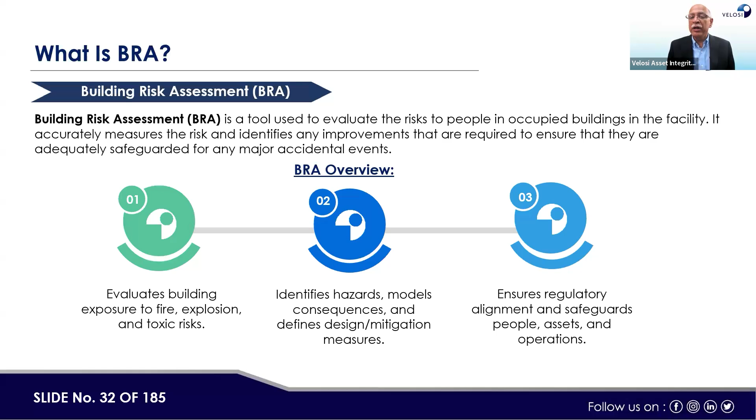If a management team is sitting in the administration building, and if that building is too close to the process plant, and the administration is required to take corrective or preventive action if an incident happens at the facility, but the administrative building or control room would itself be affected by the accident, then who would react to the accident? Who would manage the situation? Who would drive the emergency response plan? That's why building risk assessment is very important for the actions required to be taken post-accident or during the accident at the plant. That's why it is so important.

So what does BRA do? It identifies hazards at an early stage, so we can take action to protect the building. We may also know what consequences it may have in terms of losses, and then how we can prevent those losses. Let's see some examples from where we can learn lessons, where building risk assessment could have minimized or prevented losses.

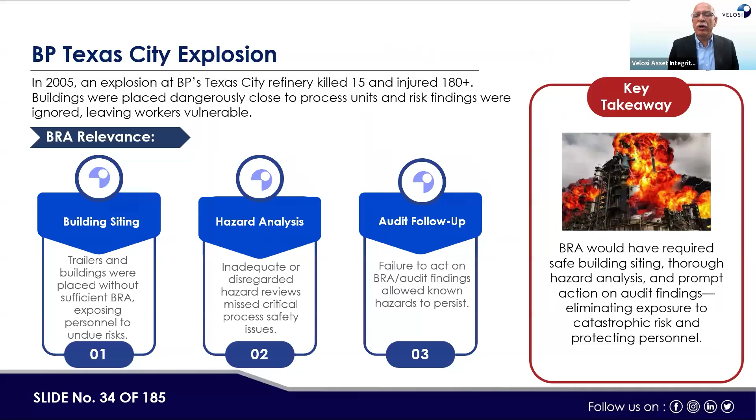In 2005, there was an explosion at the BP Texas City refinery, which killed 15 people and injured over 180. Buildings were placed dangerously close to the process unit, and risk findings were ignored, leaving workers vulnerable. If building siting or layout, hazard analysis, and audit follow-up actions had been done, then even if the accident occurred, the losses could have been minimized. During a shutdown, they placed containers for workers and contractors, and temporary offices were set up around the refinery, which increased the number of fatalities and injuries in the accident.

There's another example: the Phillips 66 Houston Chemical Complex explosion in 1989. A series of explosions occurred at the Phillips Petroleum Company Houston Chemical Complex in Pasadena, Texas. Building and layout vulnerabilities contributed to more losses. A robust BRA could have modeled vapor cloud formation and ignition scenarios, assessed building layout and spacing, blast resistance, separation, ventilation, and identified critical gaps in detection and fire protection systems. This could have helped, but since those studies were not done properly, the incidents occurred.

The answer is D, all of the above. If BRA had been done, building fire from gas leak could have been minimized, equipment damage from flammable vapor could have been minimized, and structural collapse due to explosion could also have been minimized or prevented.

Now, someone may ask, why Mr. Jaz are you going back to the basics? Well, it's basic and simple. What is risk analysis? We all know that risk is a multiple of the probability of failure, or likelihood of failure, into the consequence of failure. And there are three methods: qualitative risk analysis method, semi-quantitative risk assessment method, and quantitative risk analysis method.

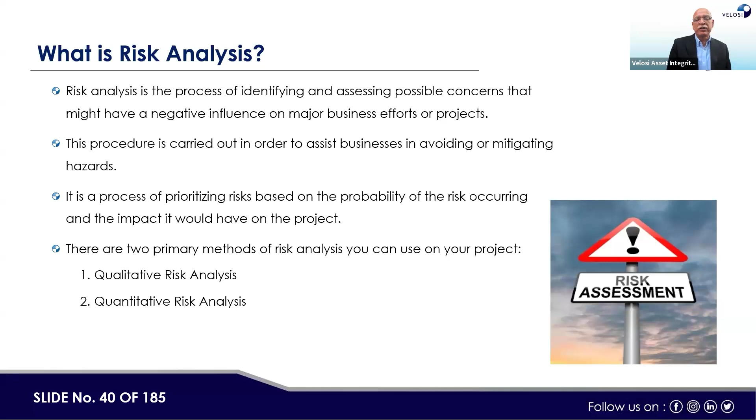So either of these methods can be used in risk analysis. This started in the 1950s as a movement to use an alternative to market insurance. Insurance companies started using it. In 1970 to 1980, derivatives were used as risk management instruments as companies improved their financial risk management. Then in the 1980s, the oil and gas sector started using it practically.

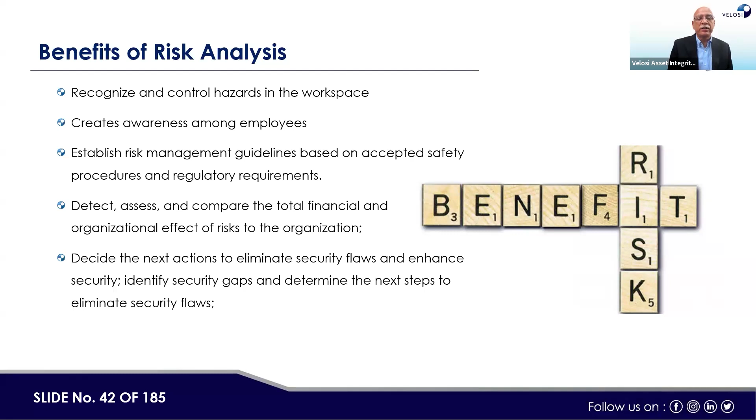Benefits include: we can recognize and control hazards in a workplace, create awareness among employees and people at large, establish risk management guidelines based on accepted safety procedures and regulatory requirements, detect, assess, and compare the total financial and organizational effect of the risk to the organization, decide the next action to eliminate security flaws and enhance security, identify security gaps, and determine the next step to eliminate security flaws.

In general, whatever technique is used for risk assessment, like FERA, QRA, or BRA, these 5 steps are almost common. First, we need to identify the hazards and risks. Then we analyze the risk by multiplying the probability of failure we assess with the consequence of failure we assess, and we get the risk. Then we develop a risk management plan - depending on whether the risk is driven by probability of failure or consequence of failure, controls or mitigation measures should be implemented. Then implement the risk management plan, then monitor the risk. These are the normal 5 steps in the risk assessment and management process.

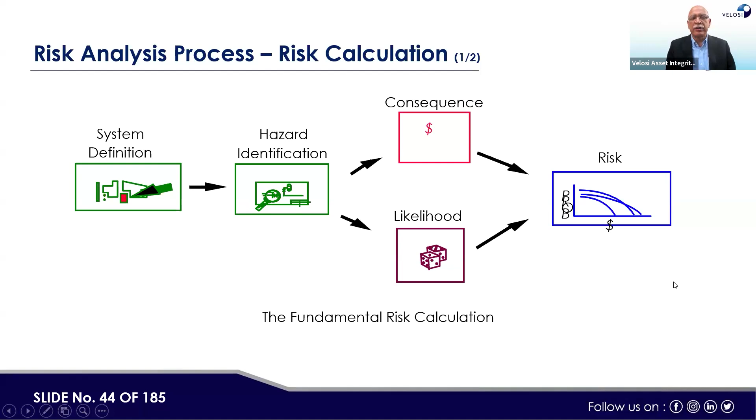If you see in terms of dollars, so we have system definition, then hazard identification, consequences, then likelihood of failure, then we get a risk. Normal fundamental definition. I know I'm repeating this for the youngsters, so you can understand the concept of risk.

We try to understand risk in terms of cost, so it can be applied. Let's take an insurance company as an example. The risk for the insurance company is the POF and the COF. Let's say one insurance company insures 1,000 cars in UAE, and charges a premium of $1,500 per year per car. The total revenue of the company is 1,000 multiplied by 1,500, which is 1.5 million US dollars.

If the number of accidents in 1 year is 50, then the chance of accident is 50 over 1,000, which is 0.05 per year, and the price for each car is, let's say, $15,000. Then the cost the insurance company ends up paying is 750,000, leaving a margin of 750,000. But if due to rainy season, fog, or other reasons the accidents go to 100, then it would be break even. But if the number of accidents goes more than 100, the insurance company will be making losses. That's why sometimes insurance companies get bankrupt. So this is an explanation of how we can associate risk with the number game in our mind.

The types of risk assessment, as I said earlier, are qualitative and quantitative. Qualitative is more judgmental based, like a team gathering - we get the idea of what the probability of failure people may contribute, then what is the consequence, and then by assessment, what would be the risk position. Whereas quantitative means there would be some numbers for the probability calculations, and some numbers for the consequence calculations. These numbers, when multiplied, give you a quantitative risk number. So that is the difference between qualitative risk analysis and quantitative risk analysis.

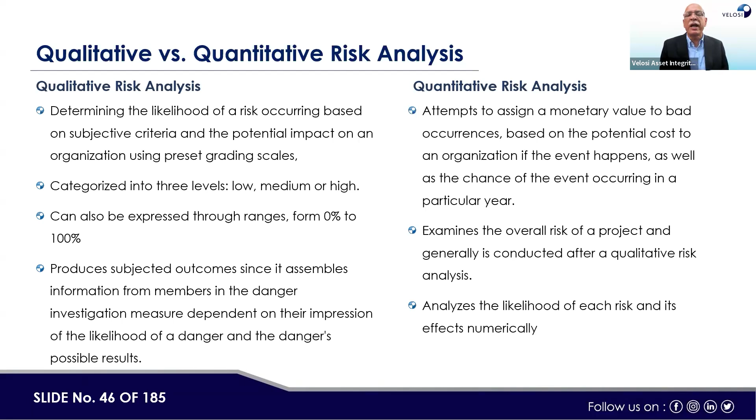Now, a demonstration of qualitative or semi-quantitative risk assessment - for example, a bow tie. In this example of a bow tie, if there is an incident, we look at what causes it first. These causes could be, for example, corrosion, lack of safe design, lack of maintenance, or lack of proper operations. This can be managed or prevented by better design, better operating instructions, better maintenance management systems, and so on, so that the leak or release of material from the pipe does not occur.

If it occurs, it may have serious consequences in terms of fire, explosion, and fatalities. How can we prevent that? That can be prevented by fire and gas detection systems, firefighting systems, or by putting bunds around the tank sides, and so on. So in this way, we can see how these hazards are first escalated or prevented, and how the consequence can be mitigated and prevented as well.

As I said earlier, there are various types of risk assessment techniques used for risk management of facilities. First is QRA, quantitative risk assessment. Then ESSA, emergency systems survivability assessment. Then ERRA, evacuation, escape, and rescue analysis. FERA is fire and explosion risk assessment. BRA is building risk assessment.

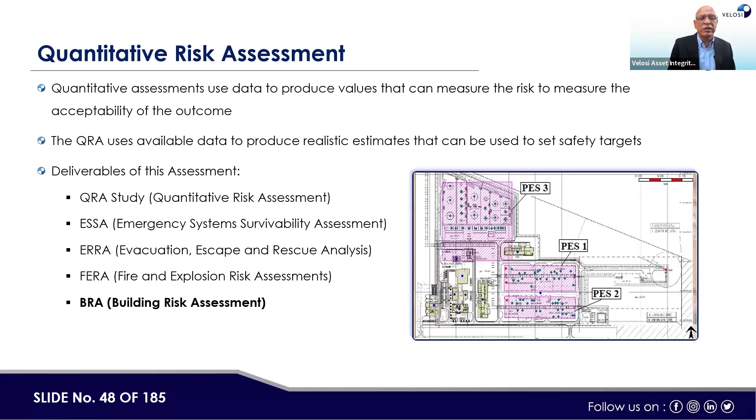All these techniques are used to assess how facilities are exposed to certain hazards, how they contribute in terms of consequences and risk, and how we should take the required preventive measures. Now if we compare these techniques, BRA, QRA, and FERA are all risk assessments, only the final outcome is a little different. We should remember this.

BRA evaluates risk to people in an occupied building from a fire, explosion, or toxic release in the building or nearby. QRA quantifies likelihood and consequence of hazardous events using measurable data. FERA is a focused study of fire and explosion hazards and their impact on the plant and neighboring plants. So FERA sometimes covers the BRA part also, and QRA sometimes also covers most part of BRA as well.

The purpose of BRA is to protect building occupants and recommend mitigations. QRA's purpose is to demonstrate facility safety, support ALARP, and cost-effective safety decisions. FERA's purpose is to identify and minimize fire and explosion hazards and ensure risks are within ALARP.

ALARP means as low as reasonably practicable. In terms of scope, BRA is narrow, covering building occupants; QRA is broad, covering entire facility operations; FERA is medium, covering fire and explosion risk affecting assets and people. QRA may be used as a final stage, integrated with FERA input, used independently or within BRA, and FERA provides hazard data feeding into both BRA and QRA.

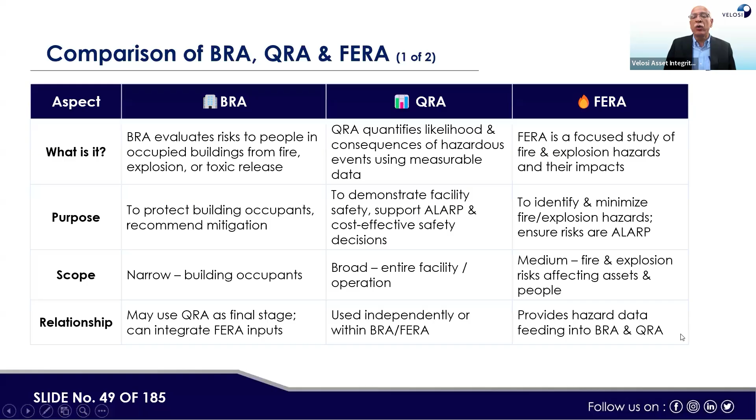In terms of process, though there are three stages, the process is basically the same, with five steps. First hazard identification, then consequence modeling, detailed as needed for QRA or BRA. Then frequency and consequence analysis, compared against occupant acceptance criteria. FERA also involves hazard identification, fire and explosion modeling, and risk evaluation. So the process is more or less the same.

In terms of output, BRA gives a report with hazards, occupancy data, and safety recommendations. QRA gives numerical risk values, risk contour maps, and ALARP justification. Then there are recommendations for fire protection, safe layouts, and mitigation measures. For application, BRA is used to assess safety of the occupied building, in compliance with API RP 752, and is used across the facility life cycle to justify safety decisions. FERA forms the basis for fire and explosion protection systems and supports BRA and QRA as well.

So this is a normal comparison. If you want an easy way to remember it: BRA is for the building, QRA is overall facility risk assessment, and FERA mostly focuses on fire and explosion impact on the assets and facilities.

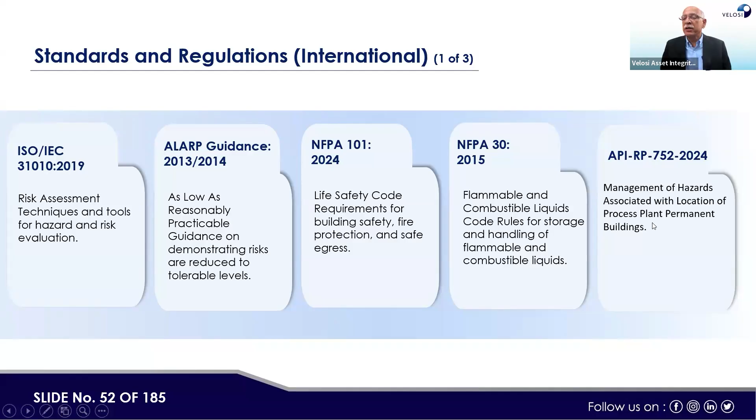Next, ISO 15544, petroleum and natural gas industries offshore production installation requirements and guidelines for emergency response, which would be applicable for buildings. Then API RP 14J, recommended practice for design and hazard analysis for offshore production facilities. API 14C, analysis, design, installation, and testing of safety systems for offshore production facilities. API RP 750, management of process hazards. And a very normal standard, risk management guideline principles, ISO 31000.

These are the standards, and also there are others like DNV Safeti or PHAST training software. Then there's the Yellow Book, methods for calculating physical effects, and the Purple Book, guidance for quantitative risk assessment. So these are also international standards.

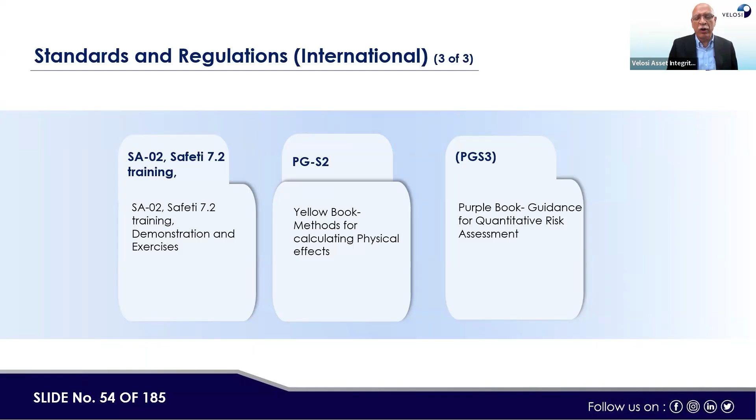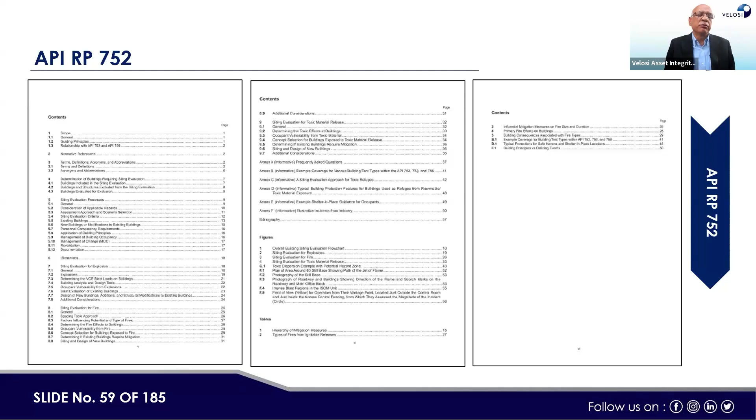Now these are the standards. I'm not going through each because I mentioned front pages are also there: ALARP framework, life safety code, NFPA 101, NFPA 30 flammable and combustible liquid code. Then there's an index for API RP 752, which is basically building protection point of view standard.

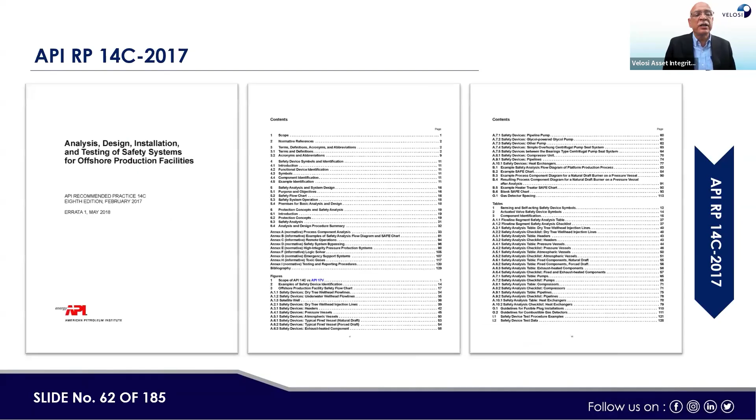Then ISO 15544. This is also offshore production installation requirement for the guidelines for emergency response, as I mentioned earlier. API 14J, recommended practice for design and hazard analysis of offshore production facilities. Then analysis, design, installation and testing of safety systems for offshore production facilities.

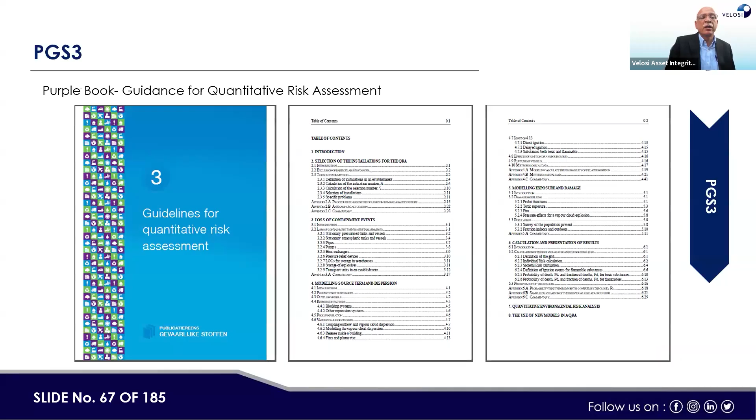Then management of process hazards, API RP 750. Then risk management guidelines, 31000. So there is a safety training manual from DNV GL, the older one. Then this is a method for the calculation of physical effects, TNO standard. Yellow book and purple book, guideline for quantitative risk assessment.

Then there is an ADNOC standard also because we are mostly operating from Abu Dhabi. The ADNOC has one of the best code of practice series for HSE management for each project. So we are also using them as one of the best practices being used by ADNOC in the region.

For example, ST10 is basically an HSE management system QRA standard. Then ST06 is regarding the control of major accidental hazard guideline or standard. Then there is also ST03, which is basically how to identify HAZID, ENVID, and OHID - safety hazards, environmental hazards, and occupational health related hazards - how they should be identified in a workshop.

ST03 basically provides the guidelines. Then HSE RM ST09, which is basically the FERA guideline or standard. Then HSE RM ST07, this is the ERA standard. There are other standards also referred in these standards, which provide quite good guidelines on how the international standard could be interpreted to make easier use.

So ADNOC has provided these standard guidelines, which are more simplified and all steps are very clearly defined, and people can use them easily.

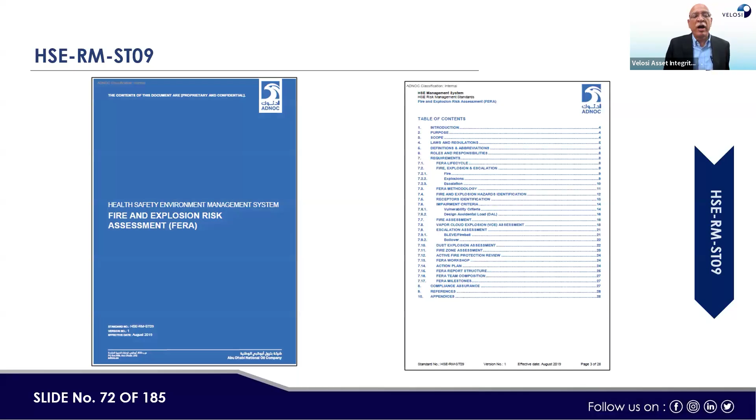So this is ST10, which is the QRA standard. This is basically the control of major accidental hazard, ST06. This is basically for ENVID, OHID, and HAZID workshop related guideline and standard. And this ST09 is related to FERA, fire and explosion risk assessment, and this is basically ERA. There are similarly guidelines for ESA as well as other studies associated with the ADNOC guidelines.

So now we start our BRA case study. One thing I would like to clarify is that we have modified the data so it does not reflect the actual situation of any facility. It's a mix of a few studies. So if any information correlates with any one particular facility, it does not mean we are presenting the actual case. The actual case has been modified and practically distorted to hide the actual situation of the facility.

So here, HSEIA study scope: Velosi was appointed by the company to carry out HSEIA for a project, including building risk assessment. An integral part of the HSEIA process is to carry out building risk assessment study, which is developed in line with ADNOC COP. At that time, ADNOC COP was an older standard because the study is older, V1-02 and V5-06.

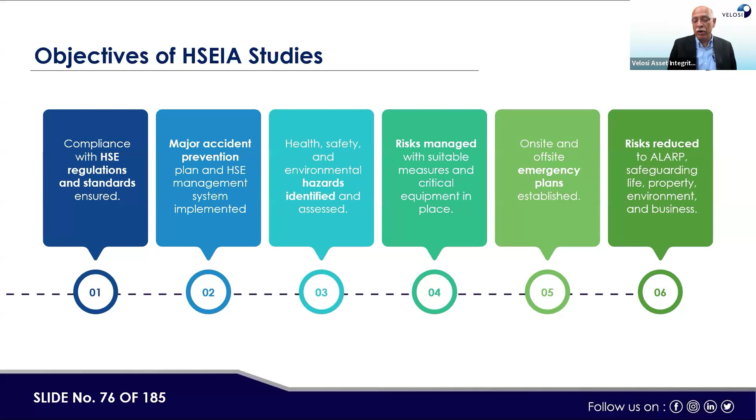So objectives of the HSEIA study were compliance with HSE regulations and standards, major accidental prevention systems should be developed, health, safety, and environmental hazards should be identified, risk should be managed, on-site and off-site emergency plans should be prepared, and everything should be within the acceptable or ALARP region. If you see, the studies are almost 20.

If you see here, BRA is one of those, including HSEIA workshops like HAZID, ENVID, OHID, Bowtie, SIMOP and ALARP. Then HSEIA studies include HSEIA screening report, HAZID, ENVID, and OHID register, HEMP review and analysis, EIA report, then PPC report, noise assessment study, H2S zoning report, QRA report, FERA report, BRA report, ERA report, ESA report, HSE critical activity register, HSECES performance standard, COMAH report, then action tracking register and HSEIA report.

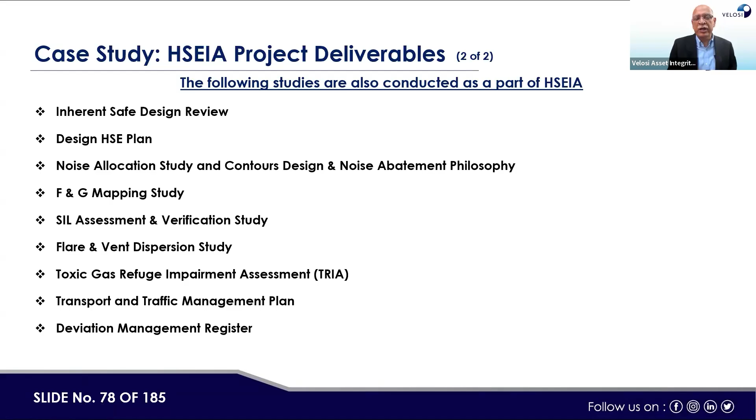This is the family for the HSEIA. Then there are other additional studies like inherent safe design review, design HSE plan, noise allocation study, F&G mapping, SIL assessment and verification study, flare and venting, vent dispersion study, toxic gas refuge impairment assessment, transport and traffic management plan, then deviation management register. So those were all the deliverables we delivered as part of this project. But our today's focus is mainly on the BRA.

So what is the BRA scope? We were supposed to carry out the BRA study to cover these 8 buildings, including substation 1, substation 2, warehouse, maintenance workshop building, control room and office building, laboratory building, canteen, locker buildings, gate access buildings, and truck loading shelter.

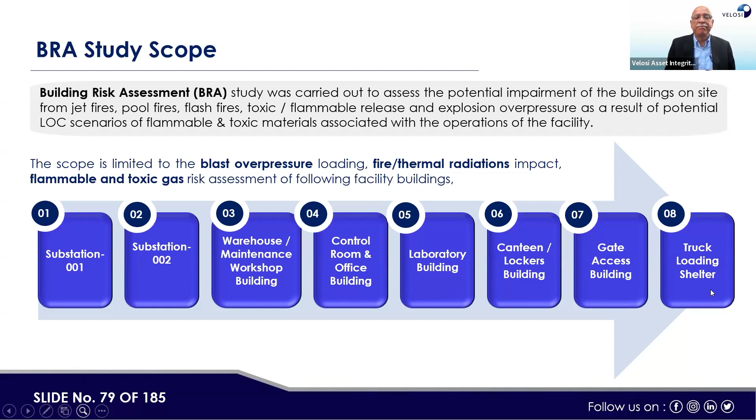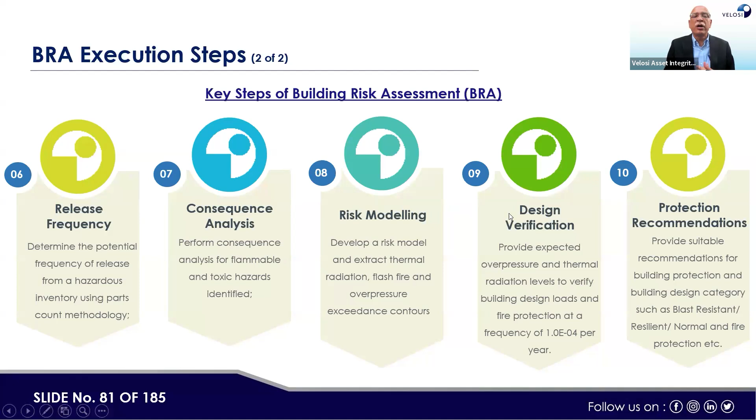So BRA execution steps, how would they do it? It's the same steps we identified earlier. It carries almost 10 steps: hazard identification, process definition, isolatable section and parts count, isolatable sections volume and mass estimation, congestion mapping, release frequency, consequence analysis, risk modeling, design verification, and protection recommendations. These are basically the 10 steps required for execution of the BRA study.

Deliverables: the BRA report, which covers terms of reference, methodology, consequence modeling, results, risk evaluation, recommendation, data tables, and figures. Supporting documents, risk matrices, plot plans, documentation of mitigation measures. Actionable information for stakeholders, awareness of risk compliance, improved building design. These are basically the deliverables for the BRA scope.

Basic data requirement, what we need is basically the PFDs, P&IDs, heat and material balance, manning distribution philosophy on the buildings, then risk tolerability criteria, applicable codes and standards, and building occupancy data also.

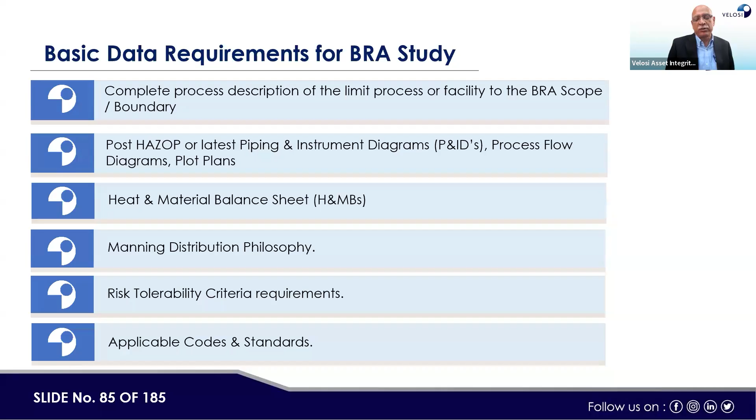Process description: in this particular study, the various units involved in the process include a fractionation unit, distillate Unionfining unit, Molex unit, PACOL unit, PEP unit, Detal Plus unit, nitrogen removal section, utility system, jetty, terminal, truck loading station. Those are units that were part of the overall process facility. Name-wise, we are not giving the overall name of the facility.

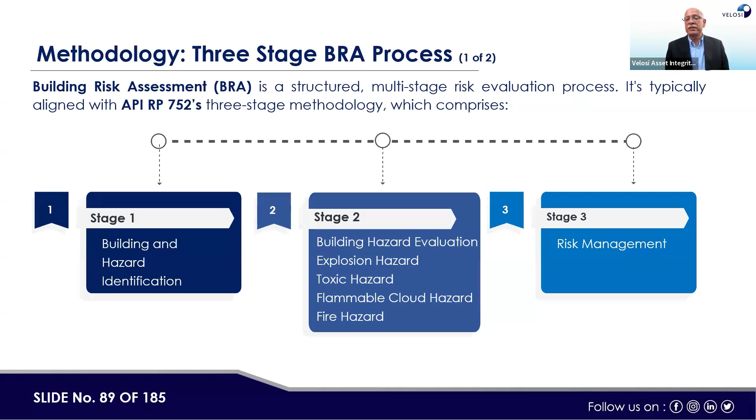From an approach point of view, we give more detail. 10 steps are there, but those 10 steps are done in 3 stages. Stage 1 is building and hazard identification. Stage 2 is building hazard evaluation, covering explosion hazard, toxic hazard, flammable cloud hazard, and fire hazard. Then risk management is stage 3.

In detail, buildings are identified by occupancy and functionality. This helps highlight those needing further assessment. As per client requirement, all buildings will be assessed. Buildings from stage 1 will undergo further assessment. A consequence-based approach will be used, focusing on worst case credible scenarios. The aim is to assess impact on buildings, including potential harm to occupants and loss of functionality.

Then stage 3 uses a risk-based approach. This method is quantitative in nature. It considers both consequences and frequencies, and so on.

Now, for people familiar with ADNOC deliverables, this is one of the flow charts. It starts with data collection, then we carry out HAZID, ENVID, and OHID workshops, focusing on the BRA or QRA or FERA, starting with the HAZID.

Then HAZID workshop reports lead to hazard classification into MAH and non-MAH. MAH are further taken to the Bowtie, which identifies a graphical representation of all the layers of protection, then HECS identification, and then performance standards. Non-MAH are managed via HSEMS. For the MAH, the real HSE studies like OHRA, EIA, air noise, QRA, FERA, SIMOPS, MOPO, BRA, ESSA, EERA are done, and finally the COMAH report is compiled.

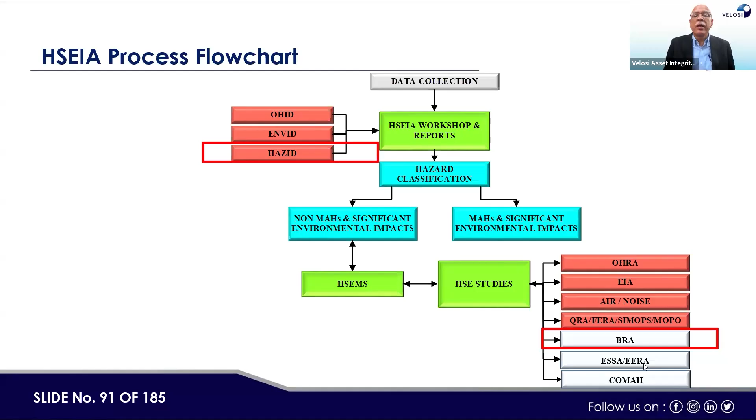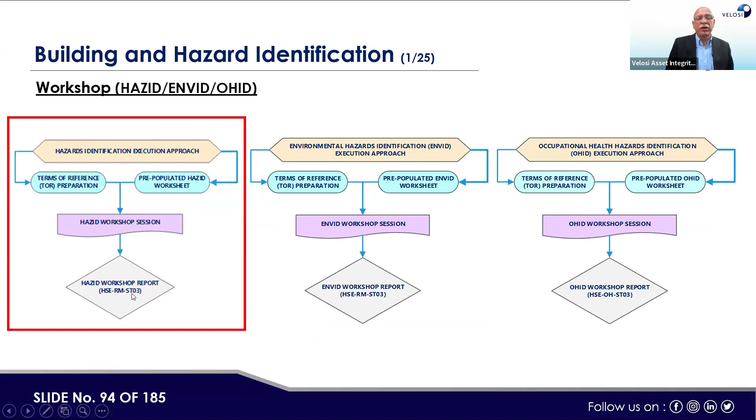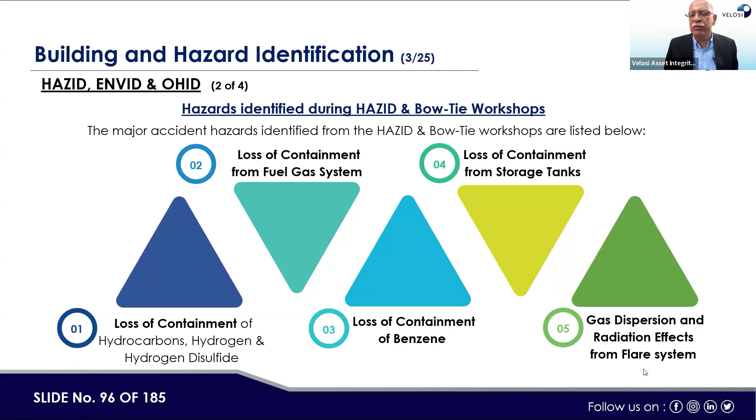So here, for example, loss of containment from the fuel gas system, loss of containment from storage tanks, loss of containment from benzene, or the various process units which were involved. So all those hazards are assessed one by one.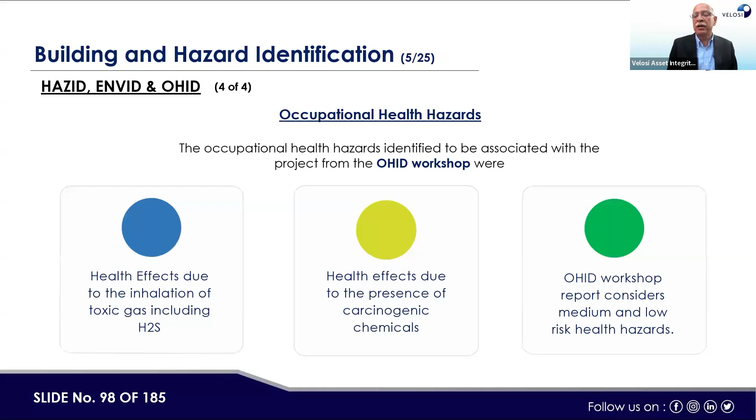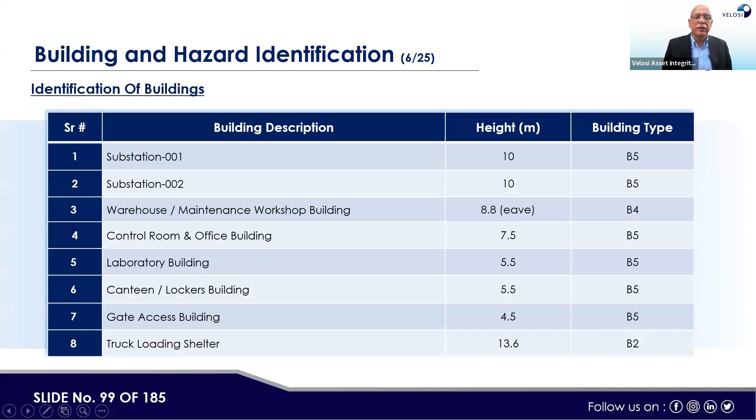So here, the identification of the buildings - these are the buildings by category, B5, B4, the type of occupancy of the building and their heights. These are the 8 buildings what we are assessing, and their locations are shown in a certain area.

So this is not the subject, but I showed you so you can see the full process of the system. Then, the first thing we do after HAZID, is when you start the BRA study, QRA study, or FERA.

In general, at Velosi, when we have to do these three studies, first of all we try to do FERA. Then the same information is carried forward for QRA, and the same information is carried forward to BRA. So basically there are common steps, like isolatable sections, which are marked on the P&IDs with the help of the ESD valves, and also remotely operated control like motorized operation valves.

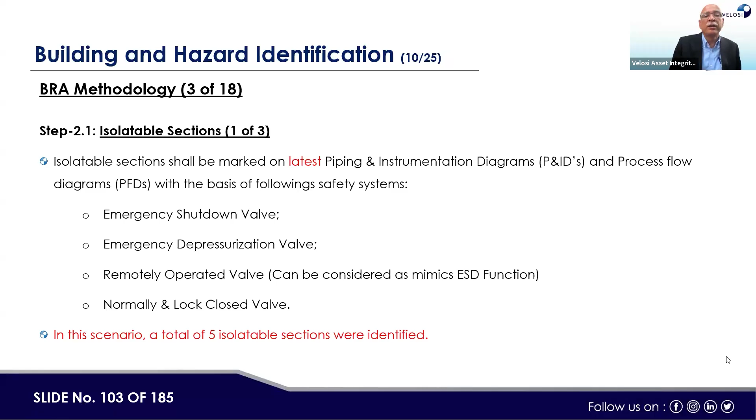They could be closed by automated action. Then there are normally-closed and lock-closed valves, or there could also be isolation by the pumps and compressor bodies. Then these isolatable sections are shown - some data has been changed here because we didn't want to show the actual data.

So where various isolatable sections are marked - and how are they marked? They are marked on the P&IDs. If you can see here, you can see them color-wise.

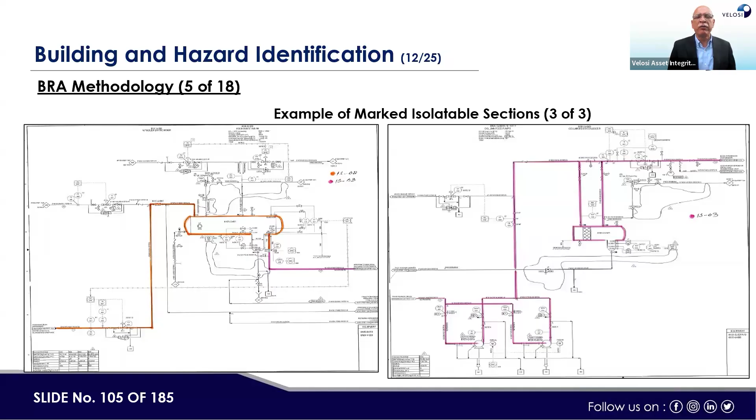There is one isolatable section. Here we can see one and two isolatable sections. Like inventory groups - if people are familiar with the RBI concept - if any leak or rupture would occur, then until the isolation is done, how much volume would come out?

That would be driven by one isolatable section, or in RBI we call it an inventory group. So then from each isolatable section, we have to see the probability of leak, like how many flange joints are there. Normally leak will occur from the flanges, and secondary leak may also occur due to corrosion, like if a hole is there in the body of the pipe or body of the vessel.

So here we try to count all those - flanges, manual valves, instrument connections, pressure vessels with connection 50 to 150, with connection greater than 150, then centrifugal pumps and piping length. So in this we try to find the parts count methodology and leak size distribution.

Then we try to see what kind of potential hole could be there: 1 to 10 mm, 10 to 50 mm, 50 to 150 mm, greater than 150 mm, or rupture. Then piping size leak for full bore rupture is also considered.

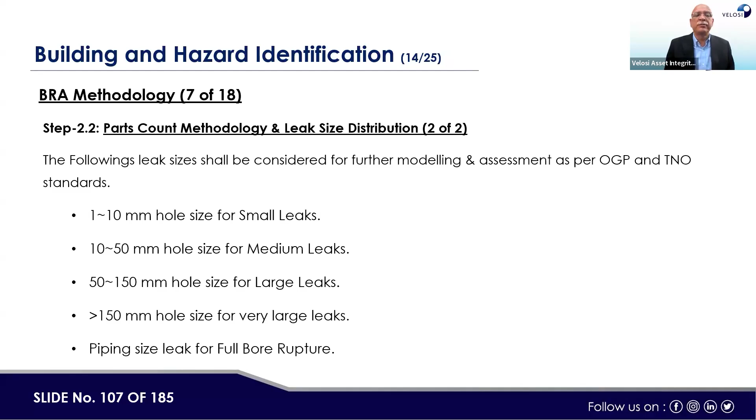Then the input sheet, source term modeling, inventory calculation - when we have to import data into the software, we use Safeti and PHAST software. So we need to estimate the volume of each isolatable section with its composition, with the operating condition, which we take from the heat and material balance of the process flow diagram, PFD.

So that information is updated, and we calculate what is the volume based on the specific gravity in the heat and material balance, what mass flow rate would be there. Then accordingly, that data would be used by the software for the consequence calculations using Bernoulli's equation and thermodynamics equations, or the reaction kinetics equations.

These are the three equations: number one, Bernoulli's equation for the dispersion; then thermodynamics, also for jet fire effect; and then reaction - heat of reaction is taken for fire and explosion. So these three types of equations are used for the calculations by the Safeti and PHAST software.

In the input sheet for source term modeling and inventory calculation, when we consider the flow once the system is taken in, there are two kinds of volume: static volume and dynamic volume. Static volume is derived from the length and diameter of the vessel. Pipes, with their diameter and length, also give you volume. The sum of all those volumes gives you the static volume.

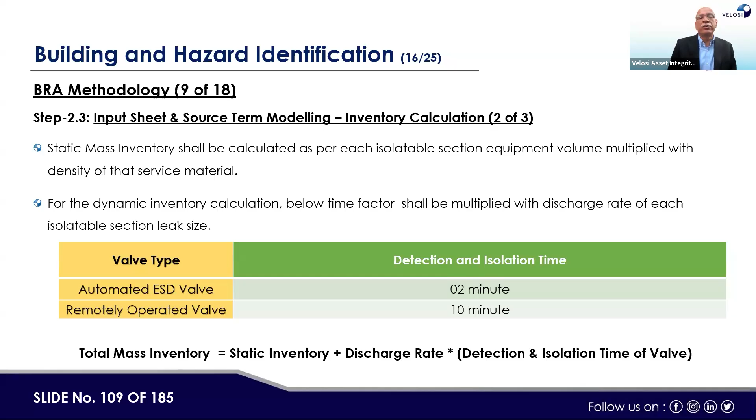This is a little complicated calculation, but if we do it step by step, it can easily be done. Then input sheet and source term modeling, inventory calculation.

Then failure frequency estimation is done based on the parts count. The total failure frequency of one isolated section is a count of type of equipment, POF, and count of equipment, and the POF of each type.

The frequency of the loss of containment for each leak source shall be taken from a validated industry database and combined with the parts count to generate the failure frequency of the leaks from each section.

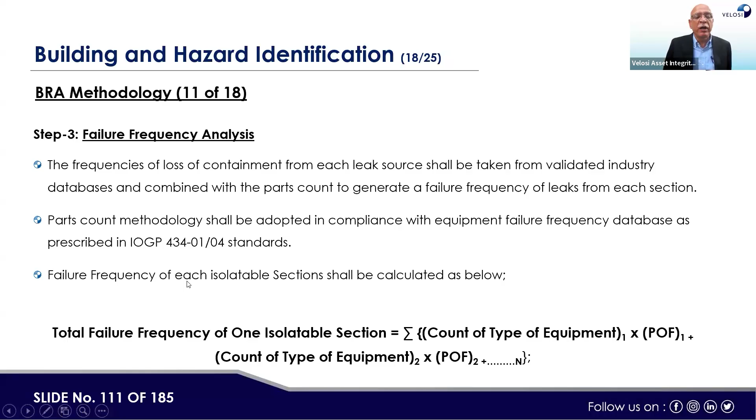Parts count methodology shall be adopted in compliance with equipment failure frequency database as prescribed in IOGP 434-01/04 standards. The failure frequency of each isolated section shall be calculated as below as a combined calculation.

Then for consequence result assessment criteria, when doing the BRA modeling, the following results would be extracted from the PHAST software: jet fire, flash fire, vapor cloud explosion. These are basically the criteria we have to use for acceptance or vulnerability aspects as well.

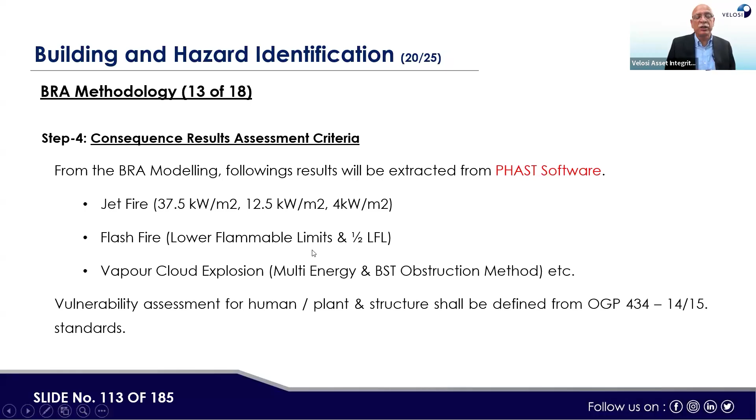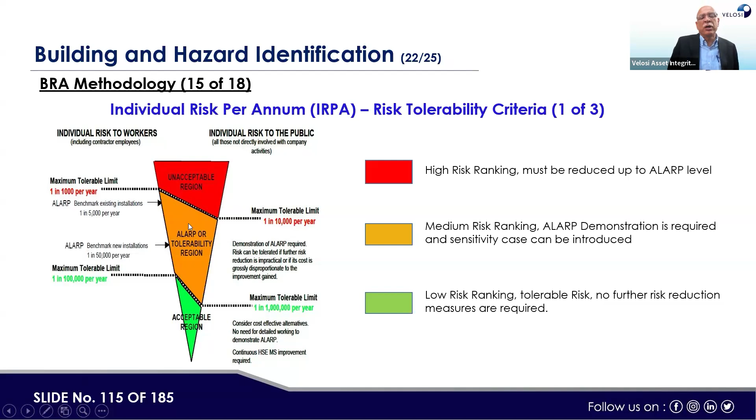Then we have to see the ALARP. Like everything, we cannot bring it to the very acceptance limit, because if we try to bring this level of risk acceptance criteria, the project cost will go very high. And in the unacceptable region, we cannot operate the plant because there would be risk of fire and explosion. So we need to operate the plant within ALARP, which is called as low as reasonably practicable.

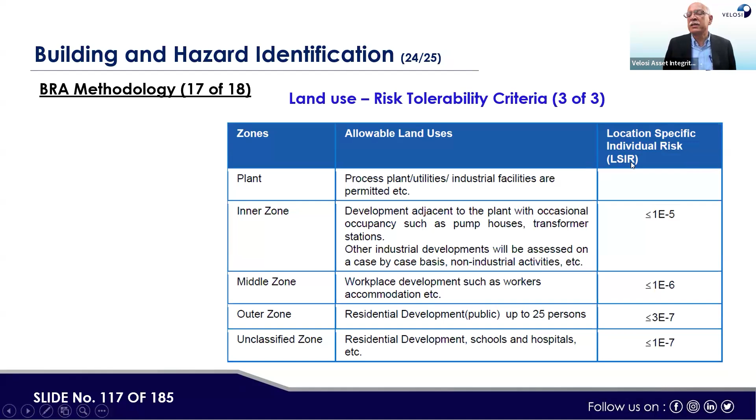Then land use risk tolerability is also there, with the plant having an inner zone, middle zone, outer zone, and unclassified zone. These are basically the location specific individual risk acceptance criteria, LSIR. So if we see the plant, this would be the inner zone, middle zone, outer zone, and wherever the buildings would be coming, those would also be shown here. This was basically the building hazard identification methodology I showed you; the same methodology is basically modeled and used.

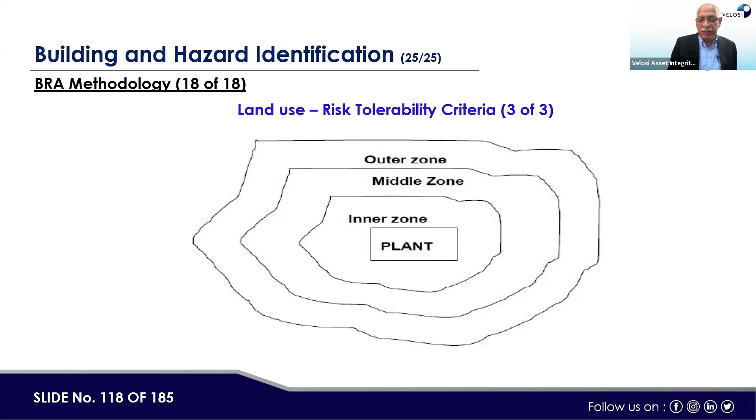But one thing, as I said earlier, if QRA is done, and then FERA is done, most of this information is already available, and we make a reference of the QRA or FERA study, and then BRA can easily be done with the simplest steps.

Then the PHAST-SAFETI software demo. If anybody would be using it, I thought we should also show you the PHAST-SAFETI. It's the DNV software we are using as a license, a perpetual license, and credit goes to them.

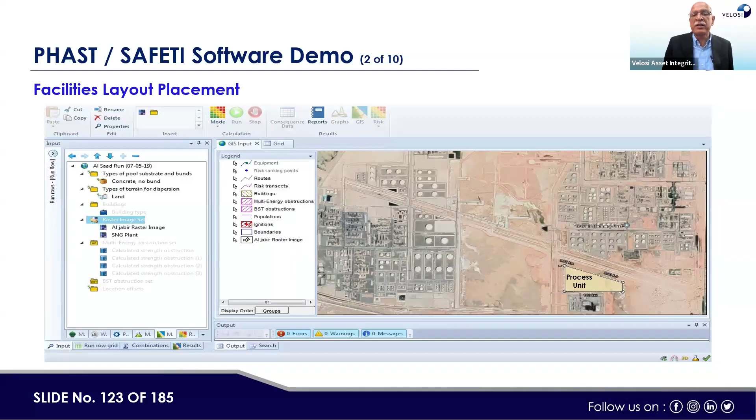Here you see how the screens start, the various legends, how the information should be arranged. The plot plan can be brought in, then isolatable sections are brought in with composition and fluids.

After plotting the isolatable section on the plot, which is not shown here, we try to run the section placement, which is shown here. There should be certain ball points or dots showing where things are, but this is not shown in this picture, so this is one missing item.

Then the data of each isolatable section we try to fill in. Then insertion of ignition sources, wherever ignition sources would be coming, the input data in the SAFETI PHAST software.

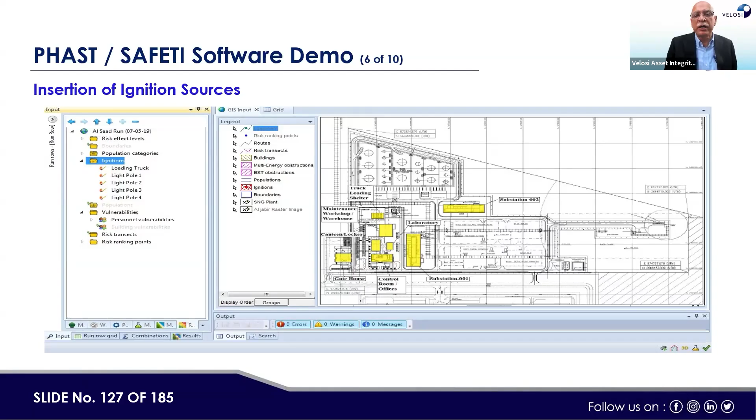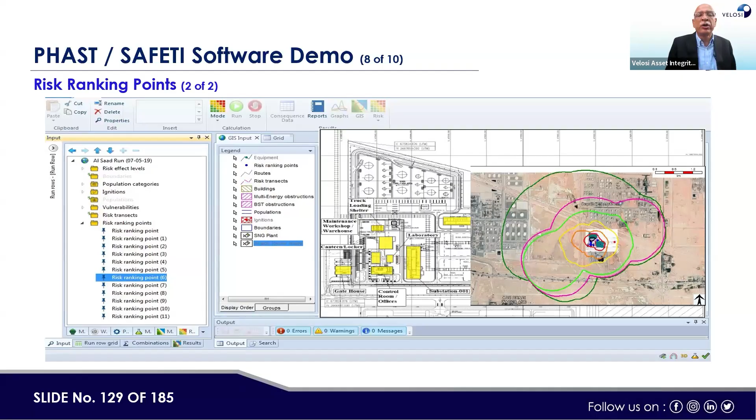Then marking your risk ranking points, receptors, where we want to see if the risk point would be acceptable or not acceptable, where accidents would take place within or out of the acceptable range. These are the risk ranking points, showing how the risk ranking point would appear on a building. This is how the software output comes in.

So now this was the methodology. We have done identification of the hazard at the first place. Then we go to stage 2 and 3, building hazard risk evaluation, and consequence risk assessment part.

In the first stage, what we did earlier is estimation of the inventory volume, selection of the consequence range of the hole size that we showed in the software, then consequence area modeling, then frequency analysis, ignition probabilities, risk modeling, building impairment criteria, and overpressure damage effects.

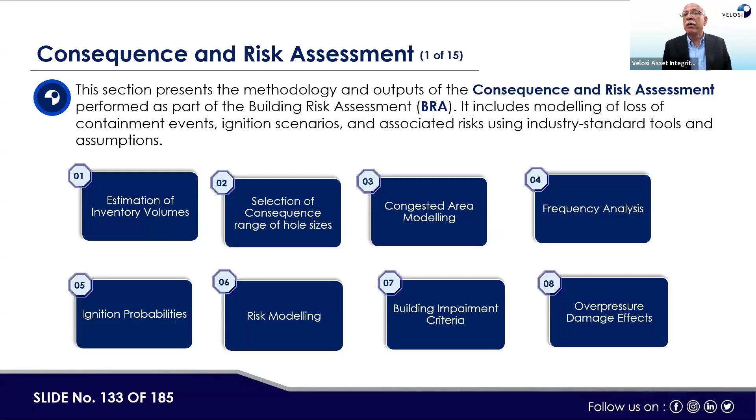This is the isolatable section of this particular facility. This is just one example - there were hundreds of P&IDs involved. We are just showing one here.

Then this is the estimation of the inventory volume calculation. We are showing you the project we are referring to here. Then selection of the consequence range of the hole sizes, from 5 mm to rupture.

Then here, congested area modeling. We use SAFETI 8.11 with the TNO multi-energy model, with input source 3D model, plant and equipment layout, potential explosion sites, then congestion criteria and output. These are all the steps done.

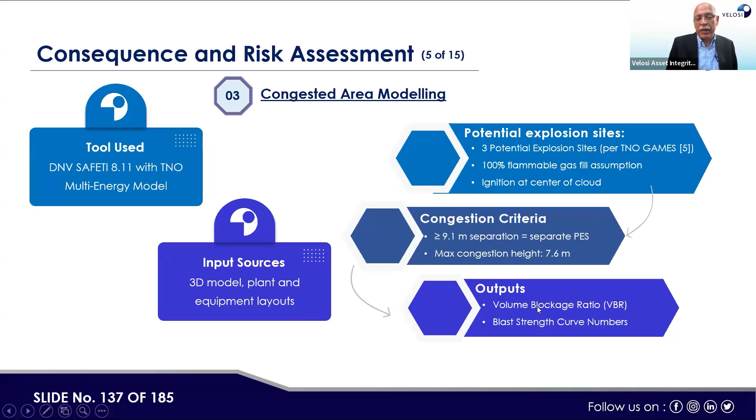Then congested area modeling, which is done as per the plant facilities, like columns and pipe racks, which could be a hindrance to any fluid release from leakage or rupture. So here is the congested area modeling - ignition energy, obstruction, parallel plane confinement, confinement, multi-energy unconfined area, and class.

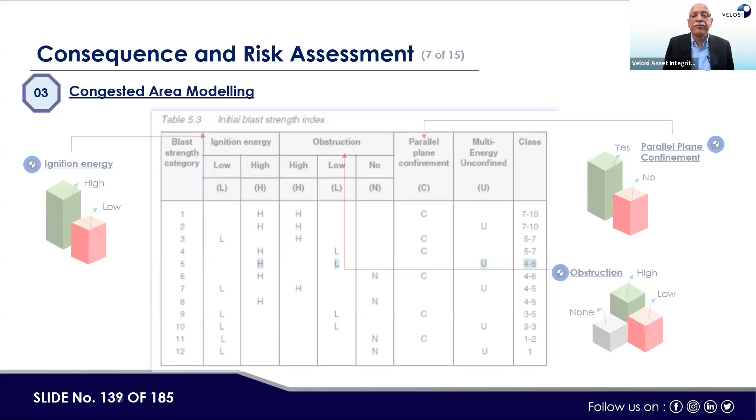Here we try to calculate volume blockage ratio, volume of obstruction, and total volume. The PES is the potential explosion sites, where we determine how much liquid will come and how much would be obstructed, and then the dispersion area or contours would be affected by this data.

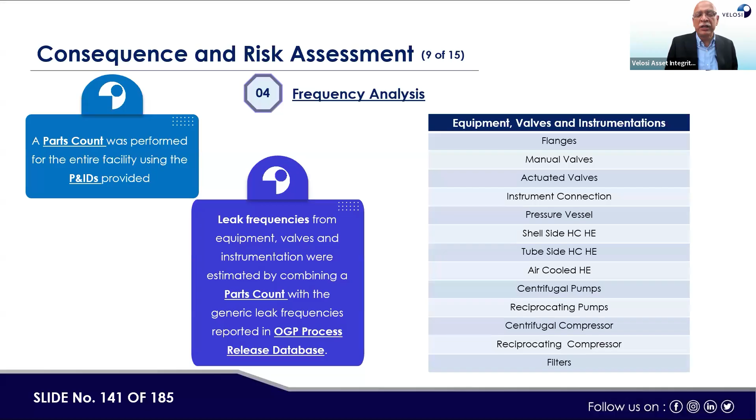So consequence risk assessment - here the parts count for the leakage frequencies, then equipment, valve, instrument, all are accounted for as I showed you in the previous section of the slides. So we calculated all the parts count, their failure frequency, and also ignition frequency.

Then total ignition probability - ignition probability is taken from the data source, application to facility, and delayed ignitions, which is flash fire 40%, explosion 60%.

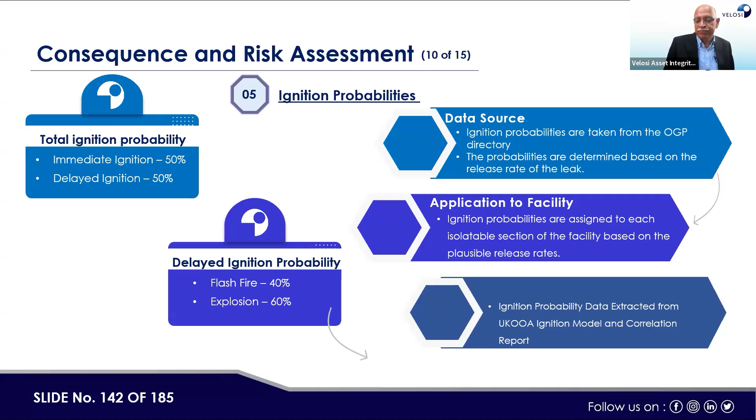Here, risk modeling - we use SAFETI software, leak size consideration, then fire and gas detection system has a positive contribution, and emergency inventory isolation valve also has a positive contribution toward risk reduction.

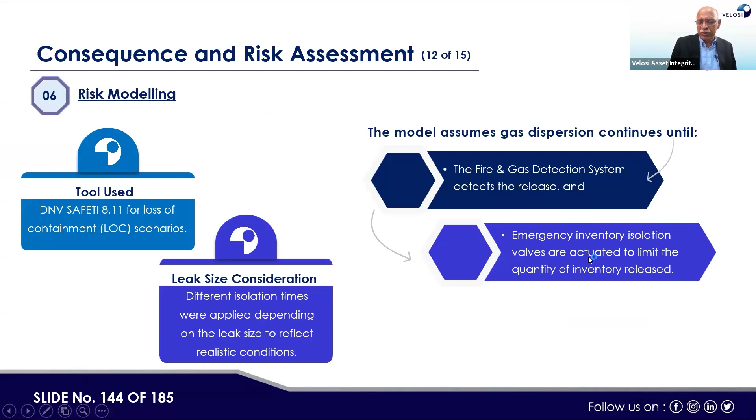Then building impairment criteria like outdoor exposure, heat radiation, and overpressure. These are the criteria: duration of fire 60 minutes, less than 15 minutes, 50 to 150 milliseconds, and 50 to 150 milliseconds.

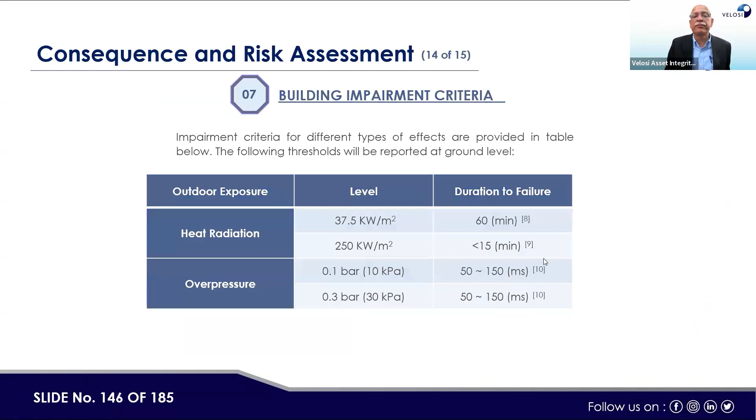I'm explaining how the process works and how it can be done. I know that within 2 hours I cannot make you a BRA expert, but you are getting some idea of how the BRA (Building Risk Assessment), QRA (Quantitative Risk Assessment), or FERA (Fire and Explosion Risk Assessment) system works.

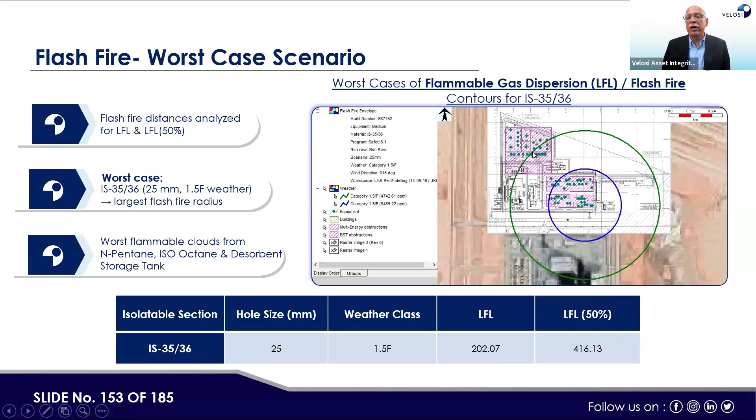This is the worst case scenario again.

Now BRA risk analysis results. Here, same, we have to see the consequence result. This section presents the risk contours. That was the consequence before. Let me show back so you can get an idea.

Consequence result means if something goes wrong, what is the effect? But when we go to risk, risk is a multiple of consequence into the probability of happening. It means the risk result, the contour, would be shortened.

Here, the same thing. This section presents the risk contours of thermal radiation and explosion overpressure in order to determine the impact on the building identified. The results are used for risk assessment to evaluate hazards, help identify potential on-site and off-site effects, and support decision-making for risk mitigation.

Risk contours are assessed for thermal radiation effects, jet and pool fires. You can see jet fire again, pool fire here, overpressure, and the flash fire and toxic gas contours. Just to show you the risk, you can understand this kind of fire can be there. Here, these are the contours.

If you see, thermal radiation at 1 into 10 raised to minus 4 frequency per year risk contour arising from jet fires - this is the area where you can see the various contours coming in. No manned and unmanned stations are impaired through the jet fire impingement and radiation directly.

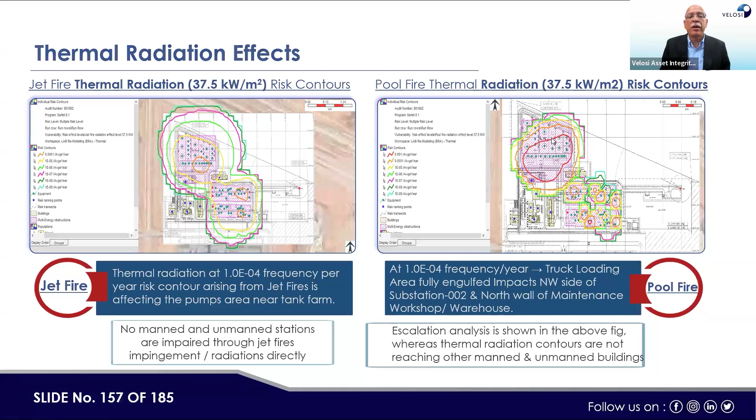Here, overpressure contours - if you see the explosion frequency contour provided, it shows no manned and unmanned stations are basically impaired, so not considered for further evaluation. This is basically the result which came for the overpressure due to any explosion.

Then flash fire and toxic gas dispersion contours. Here, if you see, these are the contours in different colors, on both sides. The flash fire LFL risk at 1 into 10 raised to minus 4 frequency per year contour is completely engulfing all unmanned and manned stations here - the problem is reaching there.

Then toxic risk impact with 10 raised to minus 4 frequency event per year is only affecting substation number 2, which is an unmanned building. That's flash fire, and this is toxic.

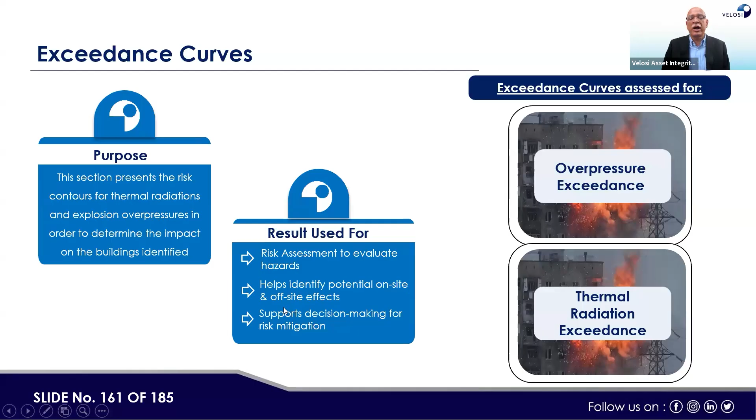BRA result exceedance curves. So here, overpressure exceedance, thermal radiation exceedance, where the target is being crossed. This section presents the risk contours for thermal radiation and explosion overpressure in order to determine the impact on the building identified. Results are used for risk assessment to evaluate hazards, help identify potential on-site and off-site effects, supporting decision-making for risk mitigation.

These are basically the exceedance curves. If you see, we evaluate peak overpressure on all manned and unmanned buildings, identify buildings under imminent threat from the explosion hazard, use 1 into 10 raised to minus 4 frequency event per year as the exceedance criteria, and help prioritize risk mitigation measures for the critical buildings.

Here, overpressure exceedance and impulse exceedance for all buildings, you can see - peak side-on overpressure exceedance at frequency 10 raised to minus 4. If you can see, these are the buildings with peak site pressure, overpressure, impulse, and impulse duration. This is the data which was produced by the software.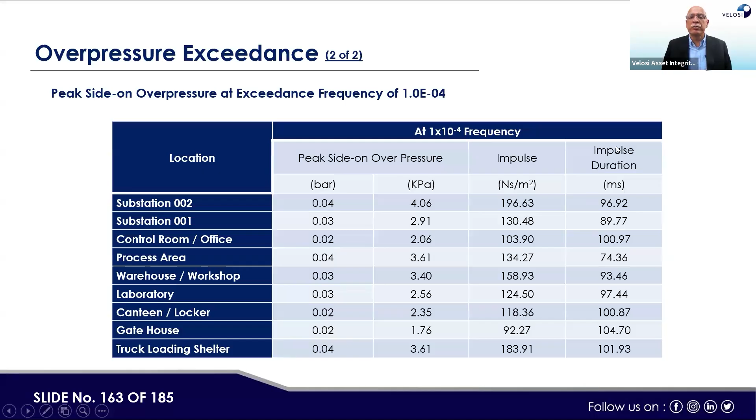Now, thermal radiation accidents for all buildings - the assessed thermal radiation effects at various intensities identify high risk areas like truck loading, substation, and warehouse. No building exceeds 250 kilowatt per meter square radiation intensity at a given frequency. Results support emergency planning and layout design for the facilities.

Now, BRA result escalation analysis - how escalation can take place. For example, if there is a delayed fire and more aspects are contributed by additional release, or if the ESD system is not closed and flow continues into the fire, contributing to more explosion and continued fire.

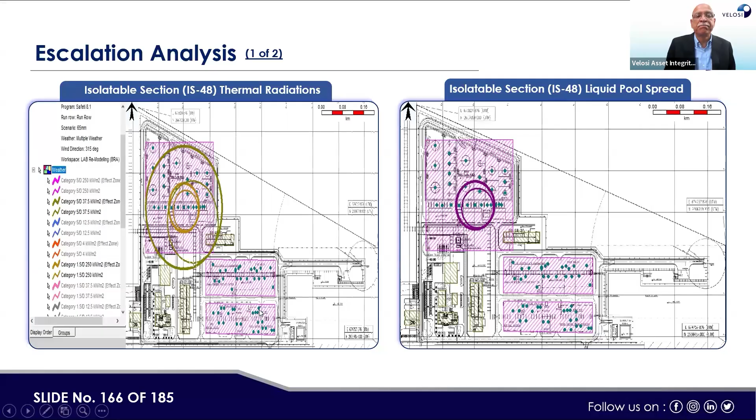Then isolatable section IS-48, liquid pool spread, and IS-48, we have considered for the thermal radiation. Here, thermal radiation impact at 37.5 kilowatt per meter square affects the truck loading shelter, substation 02, and part of the warehouse or maintenance workshop. Whereas 250 kilowatt per meter square radiation does not impact any building, and is excluded from further assessment.

Here, isolatable section IS-48 transports process unit product from the tank farm area to the jetty location. Large leak size of 65 mm and high failure frequency result in significant thermal radiation risk. Conclusion: critical areas identified for risk mitigation due to persistent thermal radiation exposure in that particular IS-48 isolatable section area. Then, pool fire.

Leakage can form a pool up to 89 meters in diameter. Ignition leads to 37.5 kilowatt per meter square radiation, impacting the building beyond the impairment criteria duration.

Then ALARP demonstration, which is done as part of the last stage of the study. Here, regulatory requirement, mitigation approach, pool spread reduction is important. The pool diameter reduced from 89 meters to 56 after bund implementation, like dikes made in that particular area.

Then effectiveness: the bund effectively limits the thermal radiation impact, reducing the risk to an acceptable level. Thermal radiation control: the 250 kilowatt per meter square contour no longer generated, and the 37.5 kilowatt per meter square contour reduced, no longer affecting the building because we added the dike in between.

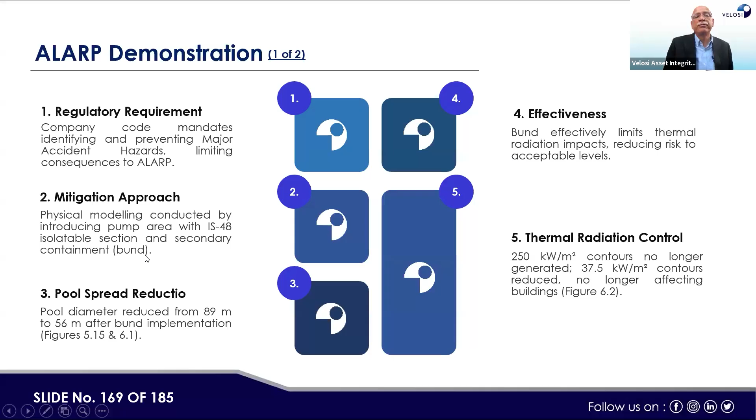So here, if you see the regulatory requirement, company code basically mandates identifying and preventing major accident hazards, limiting consequence to an ALARP region. Then physical modeling conducted by introducing a pump area with an IS 48 isolatable section, and secondary containment bund were recommended. Here, the isolated section liquid pool is separated with a bund, and the thermal radiation after bund was reduced to the acceptable limit.

That is basically the ALARP demonstration. Like if we do that recommendation, then the risk would be within the acceptable range.

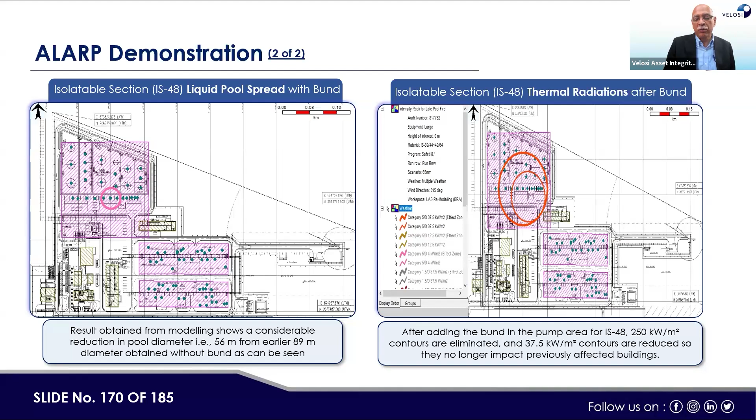Conclusion and recommendation: if we say overpressure impacts leak, peak overpressure, the highest side overpressure of 0.04 bar at the risk probability 1x10 to the power -4 event frequency at substation 02. Then impulse duration 96.92 milliseconds recorded at substation 02.

Then radiation intensity: thermal radiation of 37.5 kilowatt per meter square at 10 to the power -4 event frequency. Full impact: truck loading shelter completely engulfed. Duration concern: radiation lasts longer than the impairment duration specified for the building.

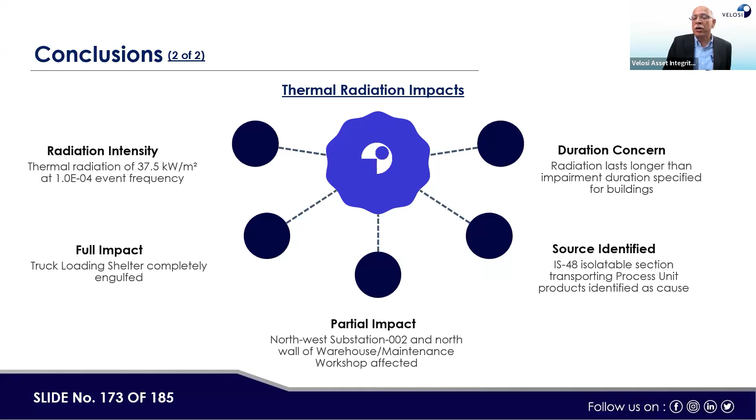Source identified: IS 48 isolatable section transporting the process unit, products identified as the cause for the high radiation. Now recommendation: secondary containment bund shall be installed for 3 pump areas separately near the storage tanks to limit leakage of the flammable material from spreading into a large pool size fire.

Similarly, the canteen and locker room shall be provided with flammable and toxic gas ingress protection, like air intake damper closure on flammable or toxic gas detection outside the building areas.

So we completed our discussion. It went very fast, but I was just going through my presentation and slides. I hope some message is conveyed and you're familiar with how this BRA system works.

BRA is building risk assessment, and it is similar to QRA and FERA; technique-wise it's the same, but the focus of BRA is to assess the risk on the occupants of the nearby buildings in the plants. This is the purpose of BRA, whereas the purpose of FERA is fire and explosion for the assets and facilities, while QRA helps to identify quantitative risks at various locations of the plant.

Now, just to check your memory guys, wake up. We are also going to the last part of the presentation. Then we will have a question answer session, and we will be able to conclude today's session. So next question, please try to fill your answers in the chat box.

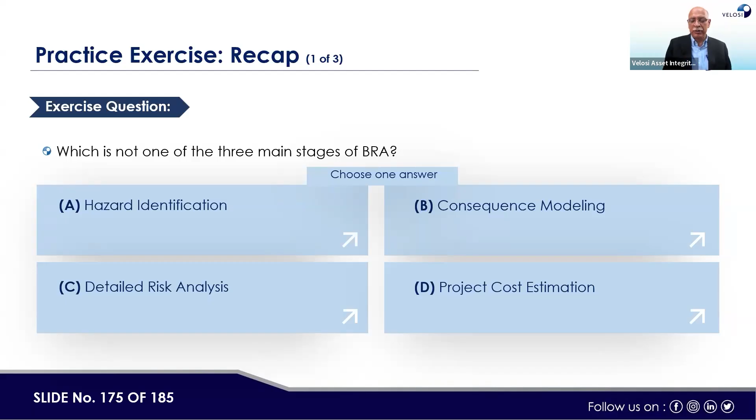Sorry, I did not write the first question properly. Which is not one of the three main stages of BRA? Hazard identification, consequence modeling, detailed risk analysis - these 3 are there. Project cost estimation is not there; this is not part of BRA.

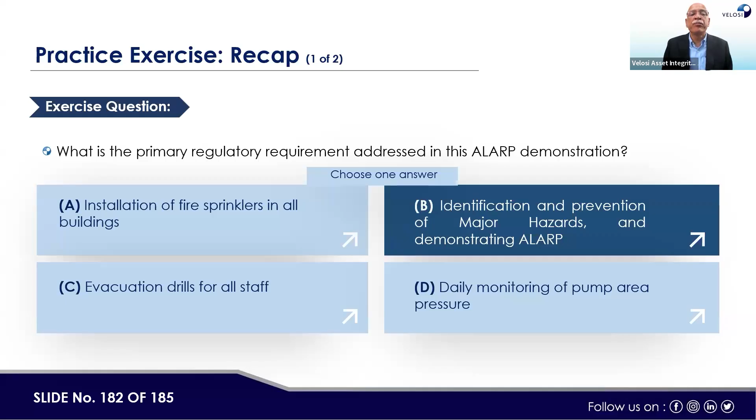We have reached the last stage. Still 283 people are attending the session, it reached a peak of 310. We are happy to see your presence.

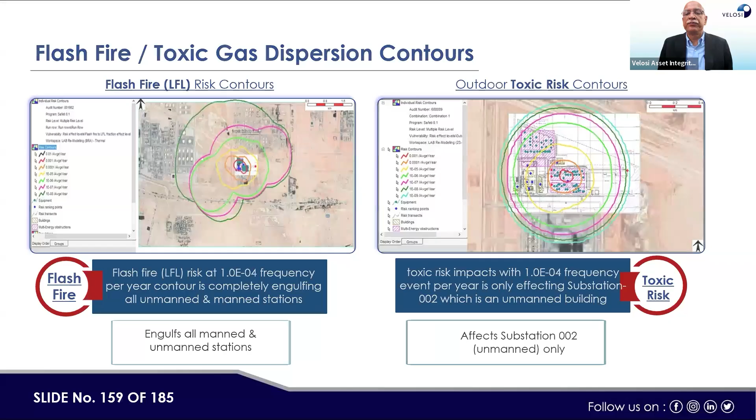There are four types of fires, if you recall from the presentation: jet fire, pool fire, overpressure, and flash fire. Radiation comes from the pool fire or flash fire, while jet fire will directly impact.

If we go to the consequence side it would be clearer here: this is the overpressure, this is the flash fire, this is the late pool fire, this is the early pool fire, and this is the jet fire.

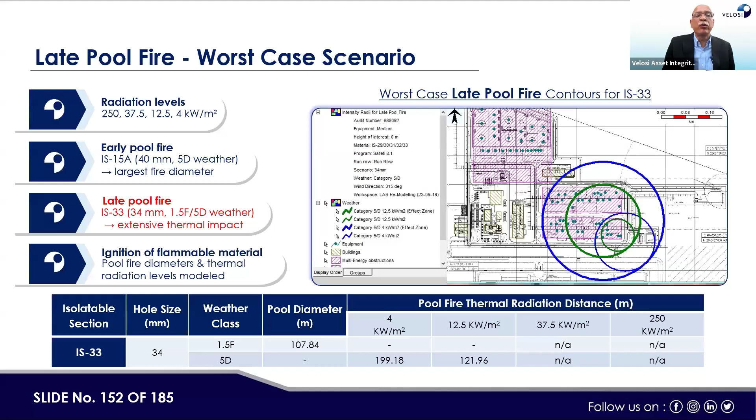From an acceptance criteria point of view, if the radiation heat does not exceed the limit, we check the contours shown by various lines. If our building falls outside that zone, it is considered acceptable. Otherwise we need corrective action: either reduce the consequence in terms of radiation or jet fire, or move the building away from that location.

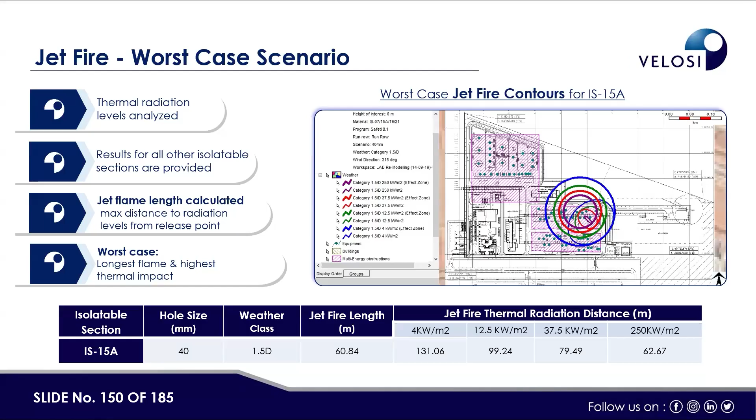Could you repeat the previous slide on types of fire and how they impact the building? Yes, these are the four types of fire, plus overpressure explosion: jet fire, pool fire, flash fire, and overpressure explosion. These are all consequence related.

Now, if the accident curve is reaching the receptor, we need to take corrective action, because we cannot expose a receiving point or building beyond the limit of the acceptable criteria.

So in this particular case, the worst case was one particular isolatable section or portion of the plant or tank farm area, which was causing a flash fire and then a pool fire, both in combination, exceeding the acceptable criteria. So by putting the bund in between, the flash area could be reduced. That's the recommendation given.

Thank you very much for giving me this platform. I must say I am very, very much pleased with your presentation. And I have quite a number of questions that I have to ask.

The first question is, what expertise does one need to be qualified for checking BRA? Do they undergo specific trainings and requirements? My second question is, does the software predict the percentage of risk in the building? And if there is software for detection of risk, is there any device that houses such software? If there is, what is the device? What accessories are in the buildings for determining risk?